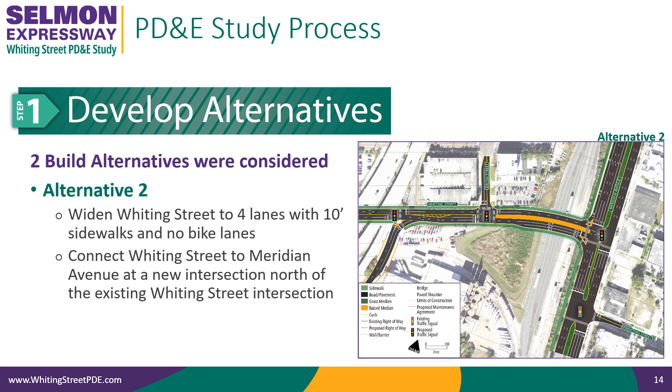Once the alternatives were developed, the team evaluated each alternative to determine how well it addressed the purpose and need of the project.

Next, we presented the alternatives and their potential impacts and gathered comments from the public at our alternatives meeting on May 20, 2021. We used those comments to review the alternatives. Mainly because of the benefits of connecting Whiting Street at a new intersection, Alternative 2 was refined before being identified as the preferred alternative. Tonight's public hearing is being held to present the details of that preferred alternative. We plan to finalize the study in the next few months.

Now let's talk more about the preferred alternative.

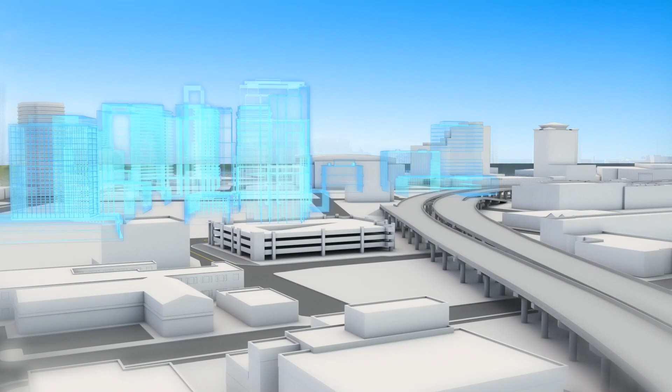Over the last several decades, the Channel District in downtown Tampa has experienced tremendous growth and change. The Tampa-Hillsborough Expressway Authority, THEA, has helped enable this growth by constructing Meridian Avenue so that the Lee Roy Selmon Expressway reversible lanes connect to downtown. THEA recognizes the billions in investment into this district, as well as the need for improved mobility, increased safety, and enhanced connectivity for all travelers in the area.

THEA is conducting the Whiting Street PD&E Study to develop, evaluate, and select a preferred alternative that will provide safe and effective access to and around the downtown Channel District for all roadway users. The preferred alternative focuses on 4 key locations of the Channel District.

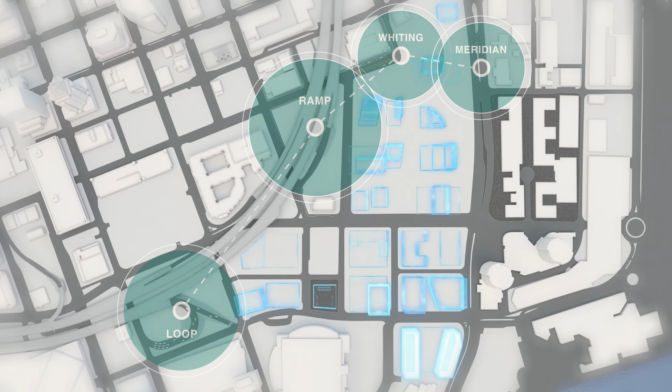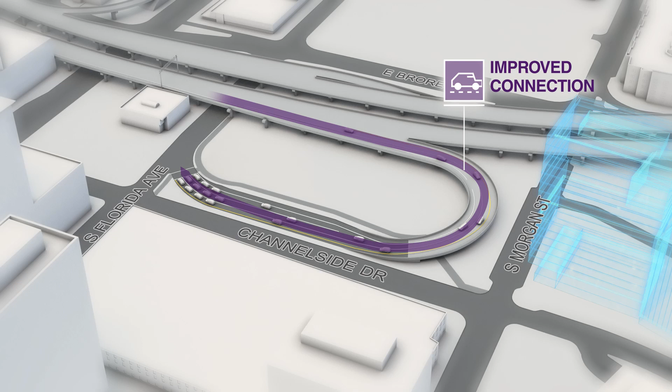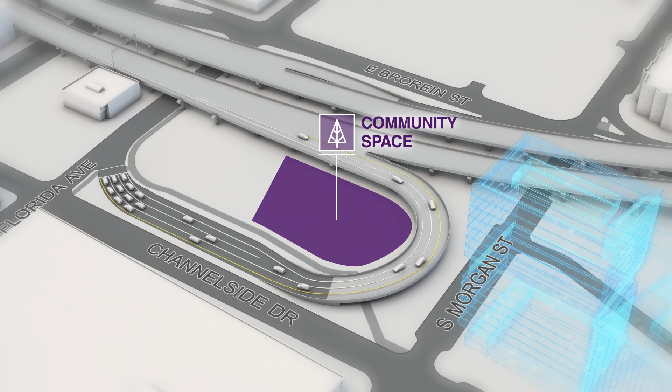The first improvement is to remove the downtown east exit ramp to allow the downtown west loop ramp to South Florida Avenue to be expanded to accommodate more commuters safely into downtown and to create a more seamless transition into downtown Tampa from the Selmon Expressway. Realigning this ramp will also provide the opportunity to develop a vibrant community space with improved pedestrian connections.

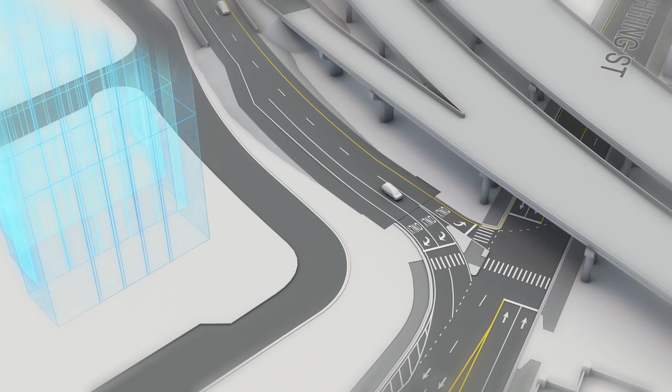The removed downtown east exit ramp to Channelside Drive can then be realigned to the northeast and extended. Shifting this ramp will enhance mobility and distribute traffic throughout downtown by tying into the future Whiting Street extension and roadway grid network. The new ramp intersection at Whiting Street will include amenities like crosswalks and a pedestrian refuge to minimize crossing time and increase safety.

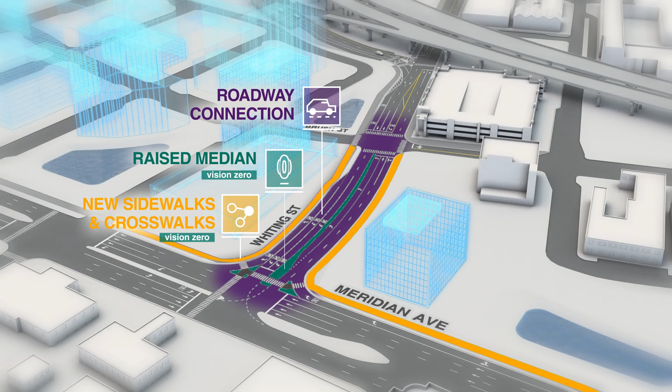Currently, Whiting Street ends at North Brush Street, cutting off a much-needed connection to Meridian from the west. Whiting Street will be extended to connect to Meridian, and roadway enhancements along Whiting will improve safety, traffic flow, mobility, and connectivity for all travelers. The new Whiting Street and Meridian Avenue intersection will enhance accessibility throughout Channelside and downtown Tampa and create more options for drivers, cyclists, and pedestrians.

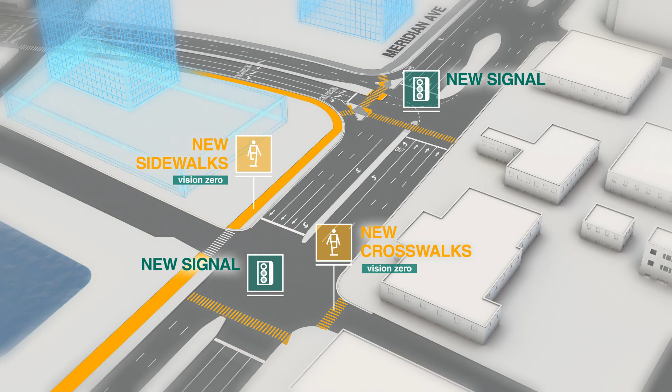New sidewalks, crosswalks, and signals will allow for a safe and convenient experience for everyone. The Whiting Street project aims to make Tampa Bay safer and easier for everyone to enjoy. More connections, more options, a better tomorrow.

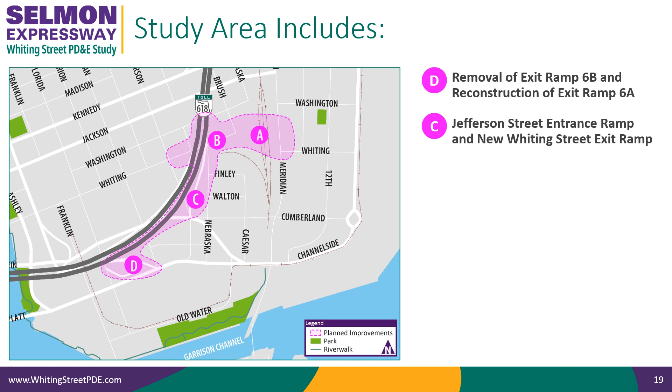Now that you've seen the scope of what we're recommending, let's go through the improvements individually. There are 4 locations included in the preferred alternative. We'll go backwards through our lettering as we describe the improvements. Location D is the reconstruction of exit ramp 6A to Florida Avenue and the removal of exit ramp 6B, which currently gives access to Channelside Drive. Location C is the Jefferson Street entrance ramp to the Selmon Expressway and a new Whiting Street exit ramp. Location B includes Whiting Street from Jefferson Street to Brush Street and the intersection at the end of the new Whiting Street exit ramp. And finally, Location A is the new portion of Whiting Street from Brush Street to Meridian Avenue.

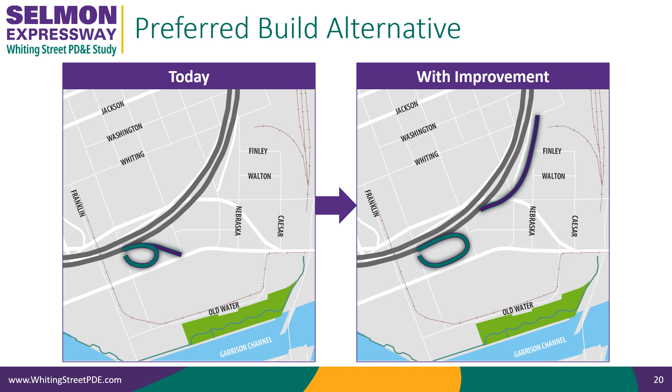Let's start in the west at Location D, where we will make several improvements to help with our original goal of connecting Whiting Street to Meridian Avenue in a safe manner for both pedestrians and vehicles. Today, the eastbound downtown exits are close together. The improvement would move the exits further apart and create an oval Florida Avenue exit ramp. This will remove the Channelside 5-legged intersection and allow for a new Whiting exit ramp.

First, we would remove the existing diagonal ramp for exit 6B. When we remove the ramp, we will lengthen the loop ramp that connects to Florida Avenue, which is exit ramp 6A, and realign it by widening the curve. This would make more room for vehicles that need to queue at the new signal at the end of the ramp and allow vehicles a longer distance to slow down before reaching Florida Avenue. We would also widen the ramp to 2 lanes through the curve and 3 lanes as it approaches Florida Avenue.

At the end of the ramp, a traffic signal would be installed to make it safer for pedestrians and for vehicles merging onto northbound Florida Avenue. This would also make it easier for drivers already on Florida Avenue that need to turn right onto Brorein Street so they don't have to weave with vehicles coming off the exit ramp. A sensor at the ramp would communicate with the signals at Channelside Drive and Whiting Street to help clear the roads and allow traffic from the ramp to flow better.

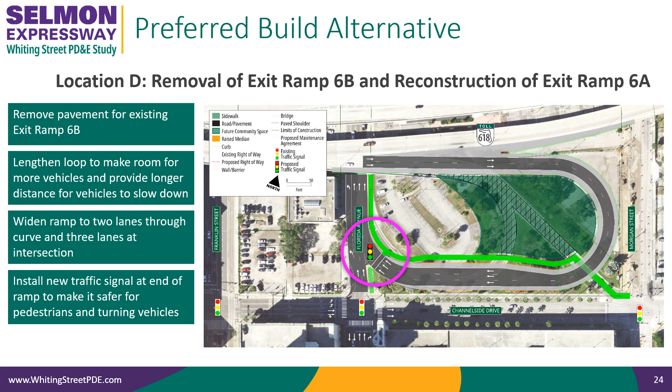Another element that will improve pedestrian safety and comfort is extending the curb along Florida Avenue so that the crossing distance for Channelside Drive is shorter. A wall will be constructed between the ramp and sidewalk to separate pedestrians and bicyclists from traffic exiting the Selmon Expressway. A longer ramp will also provide an opportunity to create a community space.

This view shows an artist rendering of the new loop ramp from the intersection of Channelside Drive and Florida Avenue looking northeast. By changing the loop ramp, we would be able to build it on an elevated structure to create a larger open area underneath for pedestrians to pass from parking areas to points of interest, such as Amalie Arena.

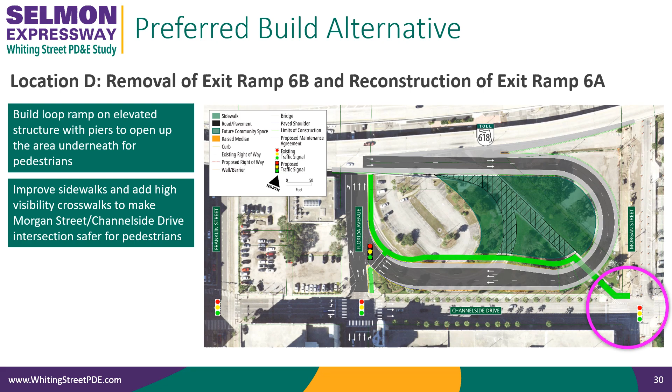For the many pedestrians that would use the intersection of Channelside Drive and Morgan Street to get to Amalie Arena, we would improve the sidewalks, add high-visibility crosswalks, and enhance the walk signals to improve pedestrian connectivity and make the area safer. This view shows an artist rendering of the new elevated loop ramp from the intersection of Channelside Drive and Morgan Street looking northwest.

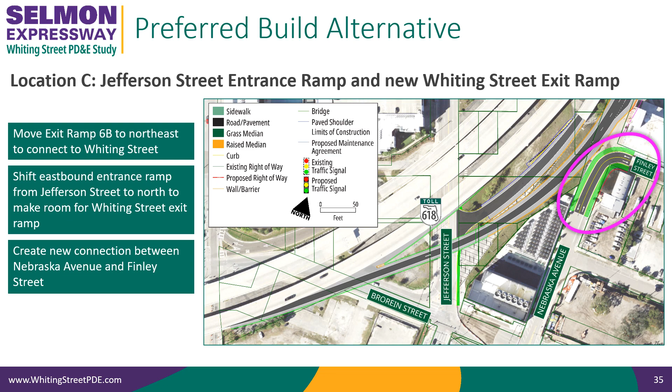Now let's move to Location B, Whiting Street from Brush Street to Jefferson Street, including the intersection at the end of the Whiting Street exit ramp. The preferred build alternative would widen the road from 2 lanes to 4 lanes, with wide sidewalks. This provides for a pedestrian connection between the Selmon Greenway and the Meridian Greenway using the south side of Whiting Street.

The Whiting Street exit ramp would have 3 lanes, with a dedicated left and 2 right turn lanes to help traffic flow better.

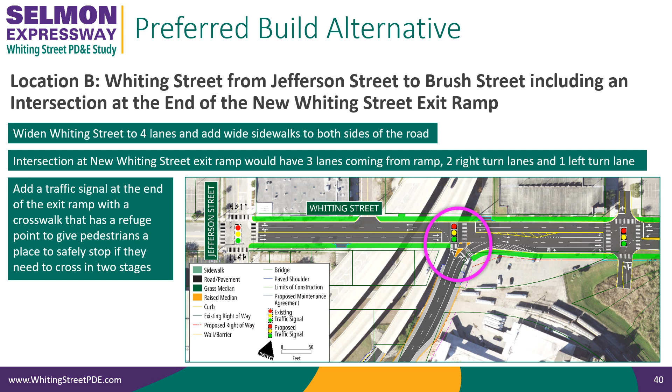A new traffic signal would be installed at the end of the exit ramp to improve safety for pedestrians, and the crosswalk would include a pedestrian refuge at the intersection between the right lanes and the left lane to make crossing safer for pedestrians who need to cross over 2 stages of the signal cycle.

Finally, we'll add signs to increase awareness to drivers and bicyclists that Whiting Street is bicycle-friendly.

Last, we'll head to the new connection at Meridian Avenue, Location A. The preferred build alternative would extend Whiting Street to Meridian Avenue directly, connecting north of the existing Whiting Street intersection. This would improve the grid network for this area and allow for the grid to be expanded in the future.

The new signal will work with the existing signal to the south, allowing for an additional crosswalk opportunity, which will improve pedestrian convenience and safety.

Then we'll install a new traffic signal at the Brush Street intersection to improve safety for pedestrians and bicyclists. We'll construct wide sidewalks for a safe connection between the Selmon Greenway and Meridian Avenue Greenway.

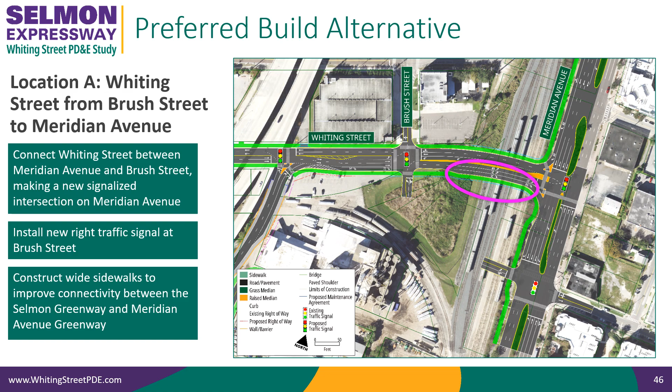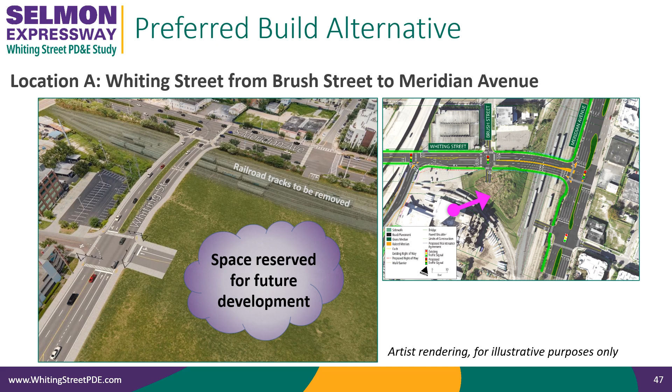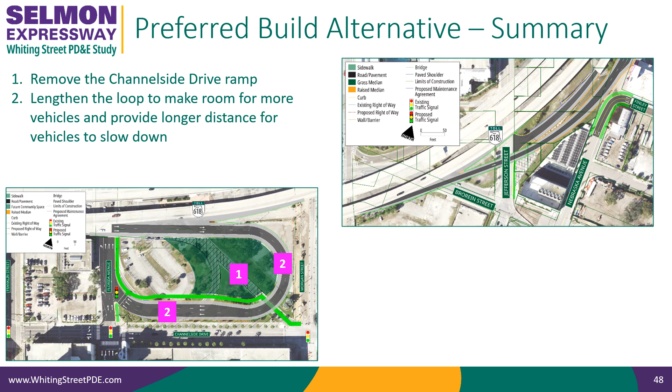Now that you've seen the recommended improvements, let's summarize. We would remove the diagonal ramp for exit ramp 6B that now connects to Channelside Drive. We would then lengthen and add capacity to the Florida Avenue ramp, improving driver safety and sightlines, and we would add a traffic signal and pedestrian features.

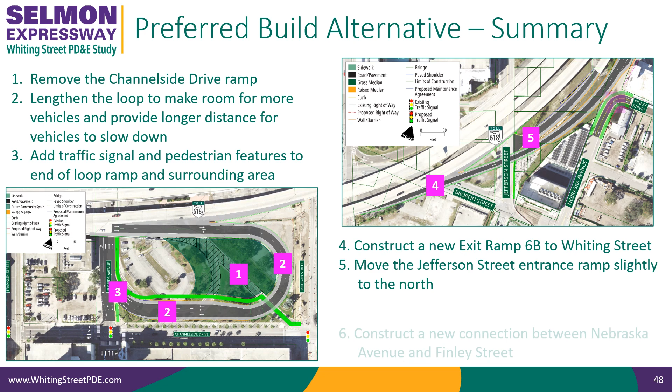We would move exit ramp 6B to the north to connect to Whiting Street. To fit the new ramp, we would move the Jefferson Street entrance ramp slightly to the north, and we would construct a connection between Nebraska Avenue and Finley Street.

Whiting Street would be widened to 4 lanes with 10-foot sidewalks on both sides of the road. We would add a traffic signal at the new intersection at the end of the exit ramp at Whiting Street, with 1 left turn and 2 right turn lanes, and add a crosswalk at the end of the ramp with a pedestrian refuge between the turn lanes.

We would add a traffic signal at the Brush Street intersection, and finally, Whiting Street would be extended to connect to Meridian Avenue.

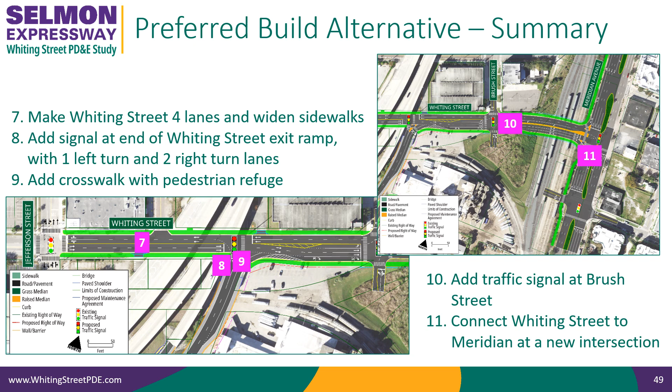Alternative 2 from the preliminary alternatives was chosen because it provides better connections at Meridian Avenue by creating a new intersection, which includes an additional crossing opportunity for pedestrians, and because it allows for the grid network to be expanded into the future. This will make getting around by foot, bike, or car easier.

The preferred alternative would require us to purchase just over a half-acre of land, which includes 4 parcels. The overall cost for the project, which includes design, right-of-way acquisition, and construction, is estimated to be $55.3 million.

An important element of this PD&E study was to evaluate the potential environmental impacts and benefits. A wide range of resources were evaluated: social features, including land use and mobility; cultural, which includes historic sites, parks, and trails; natural, which includes wetlands and floodplains; and physical, which includes air quality, noise, contamination, and traffic.

It may impact 2 historic sites: the Ardent Mills facility, which is moving in the coming year, and the railroad tracks. It has low potential for the occurrence of protected species, and may require 6 utility replacements.